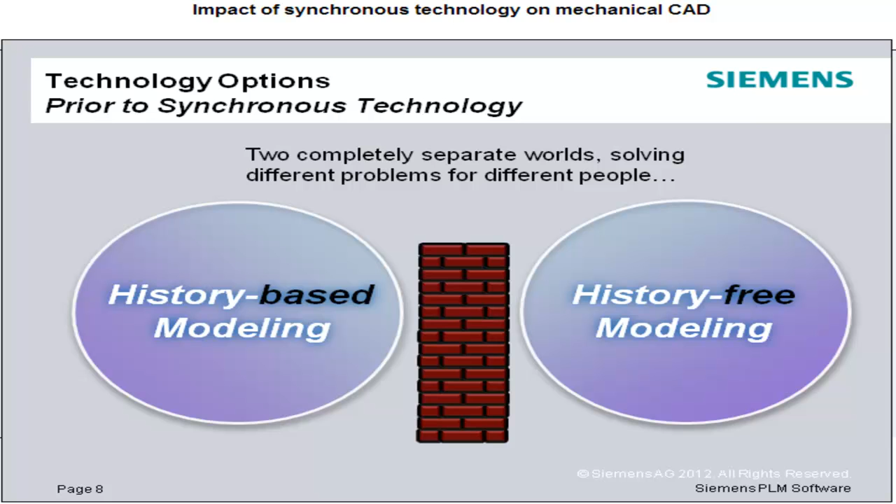So to understand those a little bit, I put together a quick backgrounder on each of the technologies. I expect most people on this call are more familiar with history-based, but I think Solid Edge still does history-based as well in certain areas, and it's something that we're all kind of familiar with, but we kind of forget some of the downsides of it. So I want to be clear on exactly how it works and what's the good and the bad of it.

So whenever you create a history-based model, it creates this recipe of steps, which is very valuable in that it captures the design intent. So you have the sketch profile, it's got dimensions, it's got constraints, all that stuff is captured, and it will replay those same steps to achieve a slightly different shape when you edit a dimension, something like that. The thing we often lose sight of is the downside to that approach, and that is that any edit requires a replay of all subsequent steps.

Now we all say, yeah, of course it does, but that's just because we're used to it. It's certainly not necessary to do so. If you have a hole on one end of your part that is feature 2, and you have a hole on the other end of your part that's feature 502, there's really no reason why editing feature 2 should recompute feature 502 and everything in between.

They're not related to each other in any way. And so that's really kind of a nonsensical thing that we've foisted on the community with history-based modeling.

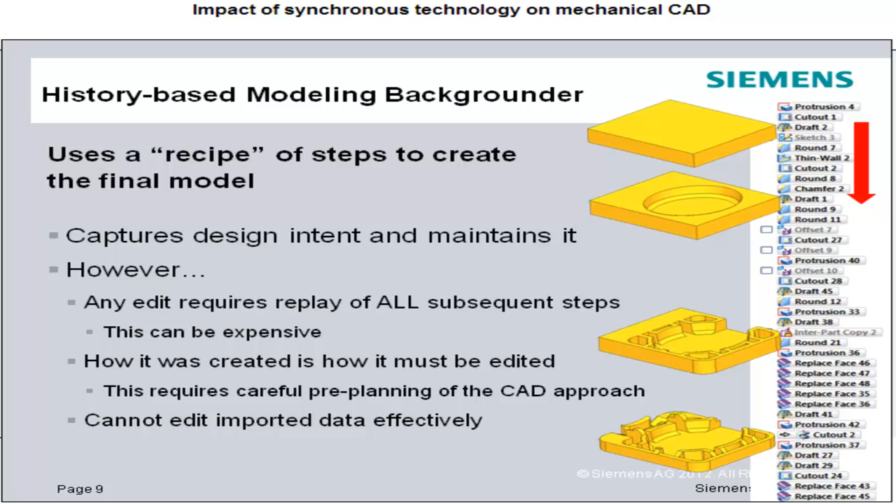So just to give a quickie on how this works, I think many of you on the call know this. If you start at the bottom of the screen and the boss says, make this oval bigger, you end up having to roll it back to the top of the tree here where the oval was instantiated, and this is a real part. Edit that, and then regenerate every feature below it whether they changed or didn't change. And so that's the good and the bad of history-based modeling.

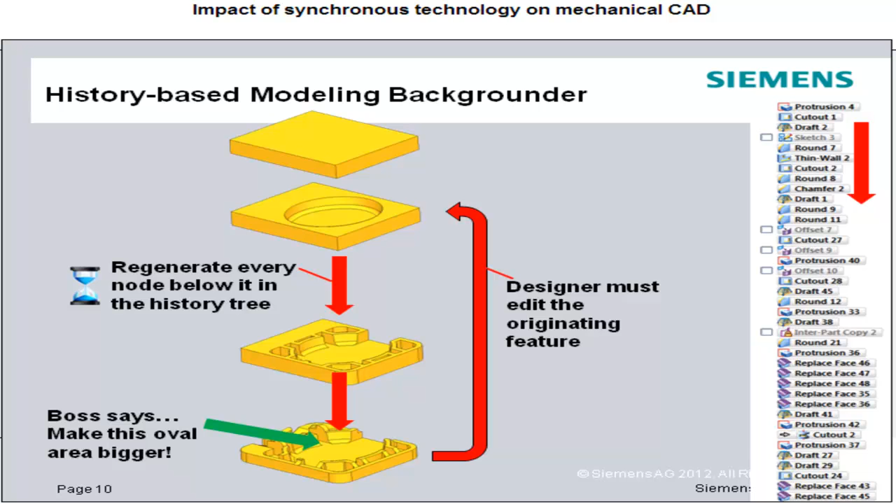If we then look at history-free systems, basically there is no recipe or history tree, so it is just the body itself, and you do all the editing. But typically in these systems, it's all done through a push-me, pull-you interface, so that's what I call it, where it can be precise, but it's not necessarily a dimension-driven system.

And so what you see is it's very fast and flexible because you don't have to recompute or regenerate the recipe. But they tend to be, and we looked at a lot of these systems before we built synchronous technology, the places where these systems tend to fall over is being not very feature-based.

It's hard to capture and maintain that design intent, and they tend to be significantly non-dimensional. You tend to do a lot more push-me, pull-you, and less, I want to set all these dimensions to particular values and have them respected. And so that's kind of the way a history-free kind of system would work.

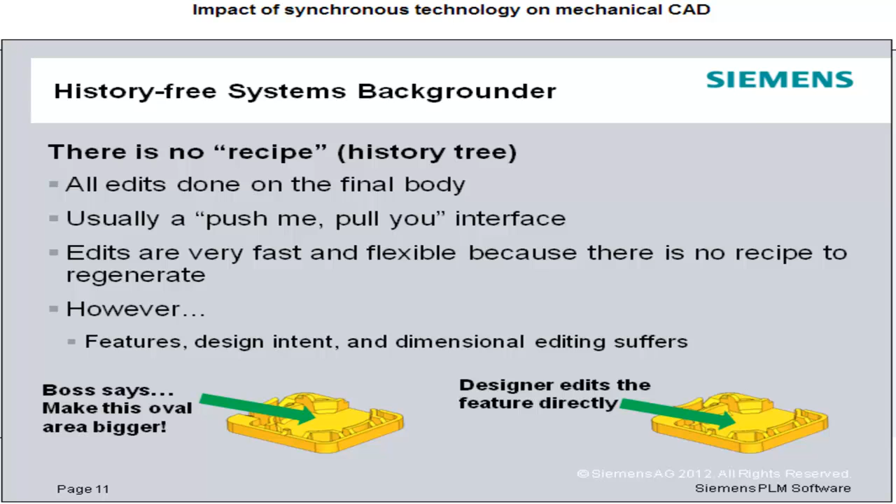Now, the reason this is relevant to you guys is what it ends up doing is kind of forcing you into a camp. You're going to have to decide, do I more fit profile A or profile B? Profile A being history-based: I've got these well-defined problems, my dimensions are well-known, my changes are usually fairly minor, and so on. People fall into this category of choosing a history-based system if they most closely identify with those statements.

Now, if you go over to history-free, people who fall into this category typically say, well, my design changes all the time, my design needs are very fluid, I don't know what changes are going to be asked of me, and so you end up in this direct manipulation, history-free modeling kind of place.

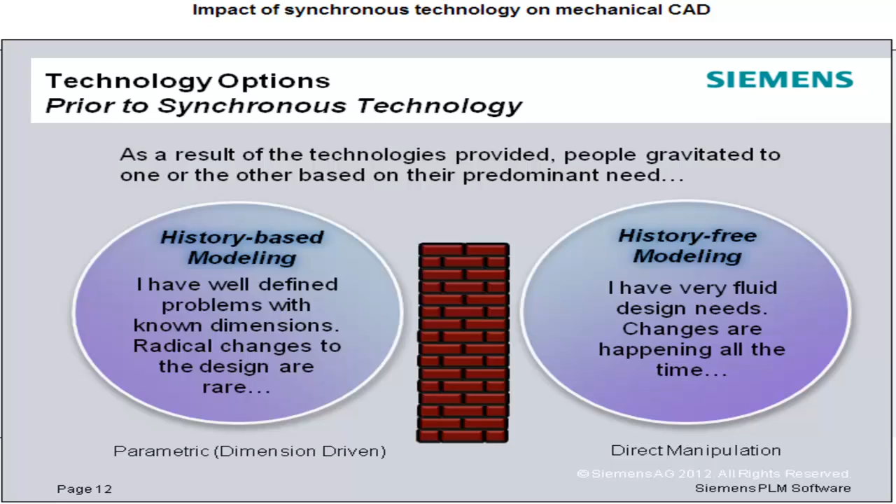Well, that's all well and good, but that's just because we as a CAD industry have pushed to you these two technologies, and you have to decide one or the other, even though you might not be able to identify with all of these statements, or you might identify with statements that cross the line. And so I think that's the big, bad secret: the user is not one-dimensional.

You don't fit in either of these two camps. So what tends to be true for almost everybody, I think, is, as we said, design is not a linear process. And so at the early part of design, you want to try out different things. You have very fluid design needs. But at some point, you get pretty locked down.

You're like, I need this to stay this way, I need that to stay that way. And so you have the very well-defined dimensions and behaviors. And then finally, we certainly can't make the presumption that you're just always designing all your own stuff. There's lots of stuff to integrate from other systems. So I think this is the more realistic profile of most users.

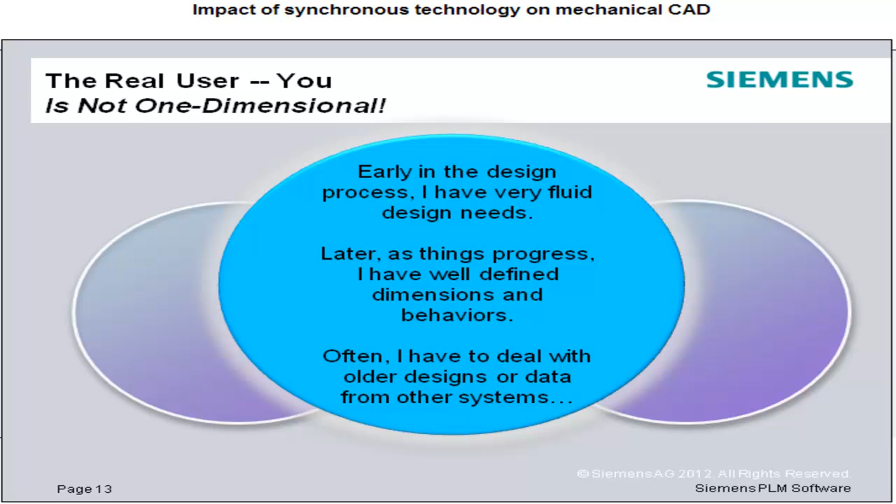And so as a result, that's what we developed with synchronous technology. If you think about history-based modeling, on the left, I want to be very clear - Solid Edge was purely a history-based system for 13, 14 years maybe. There's very good things in history-based modeling. It's very automated - you make a change, lots of good stuff happens. It's very dimension-driven, which is the way engineers and designers like to think. And it's feature-based. Those are all really good things.

Then outside the scope of that are some not-so-good things, right? There's the pre-planning that's required, the pain if you have to change something you hadn't planned for. Large feature models can take a long time to regenerate. So those are some of the not-so-good things.

If we go to the right-hand side of the equation, we see that history-free modeling also has some really good things. It's very direct - people love the directness. I just tell it I want to do this, and it does that, and it scales very well on many featured parts, and it's very flexible. But as I said before, it's not very good at feature-based modeling. Dimension-driven usually suffers, and so on. So there are pluses and minuses to each of these technologies.

So what we did with Synchronous was to say, well, why should I have to go into one camp or the other? Why can't I take the good dimension-driven, feature-based concepts and scale that well on many featured parts in a direct way? And the answer is, yeah, you can do that - you just have to invest a lot in technology to make it happen.

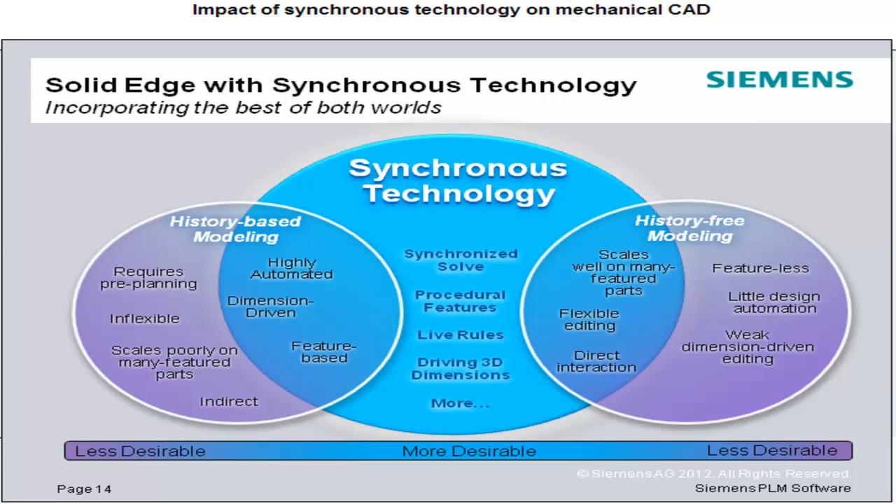I'll come back in just a second to how it is that we're able to invest in that technology and make it happen. But before I do that, I'm going to show you a little clip to compare the two. This particular clip revolves around the notion that we're going to do the exact same change, first in ordered or history-based, and then do the exact same change in synchronous, and just give you an opportunity to see and compare and contrast the two.

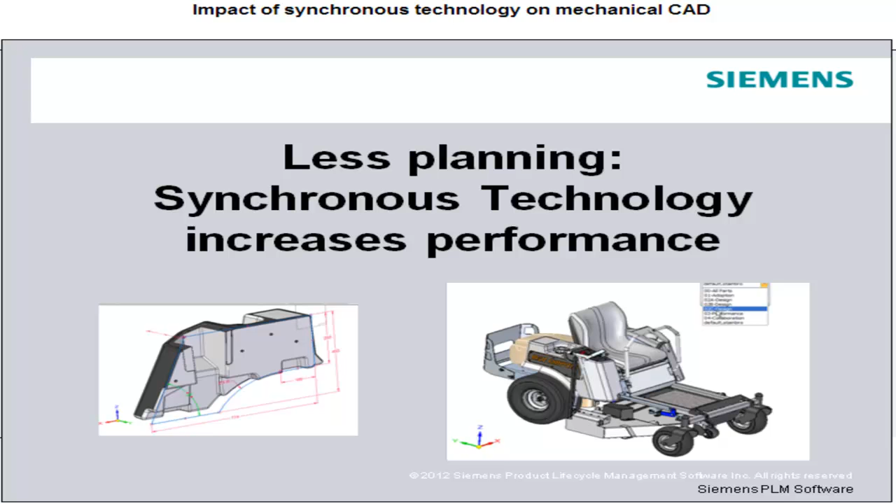If you've used a traditional 3D CAD system, you're familiar with performance issues due to model regenerations. Let's look at a typical engineering change order scenario and see how much faster edits can be made using Solid Edge with synchronous technology.

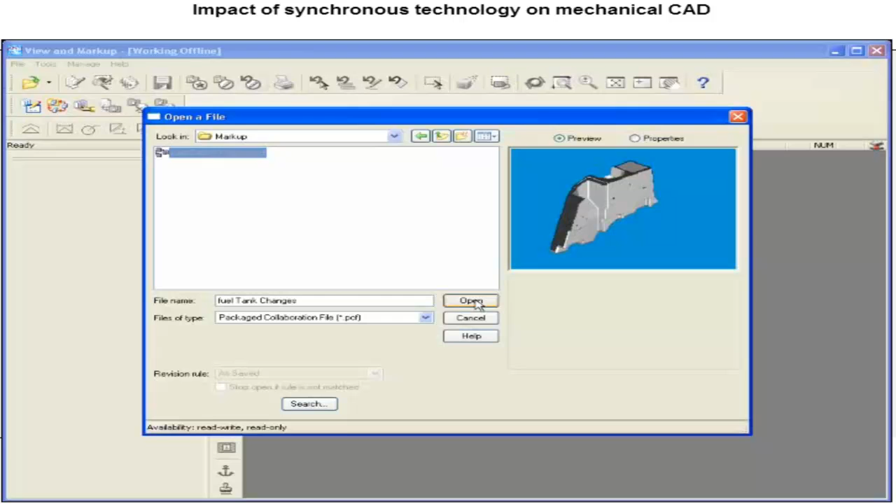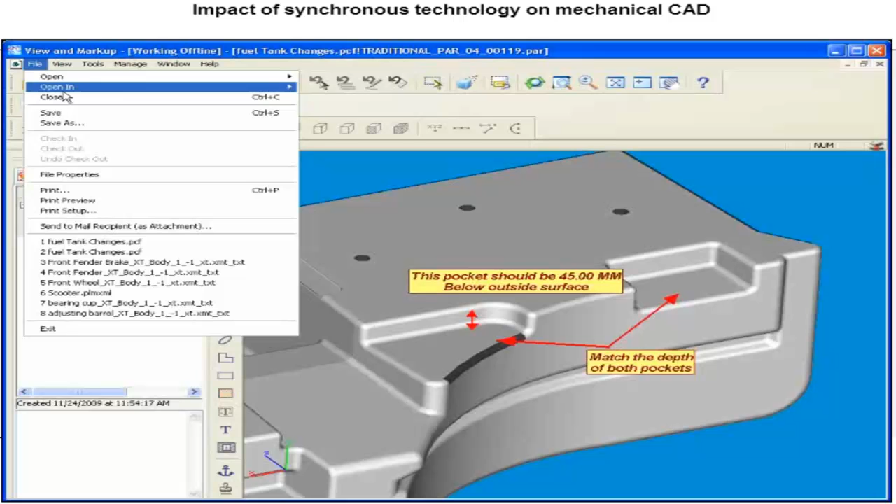Most change orders begin with documenting a set of requirements. View and Markup in Solid Edge allows you to efficiently mark up assemblies, parts, and drawings, which can be emailed using a lightweight PCF file. Recipients of the file can view the changes in Express Review, a free viewer that can be downloaded today. You can package all types of documents such as requirements documents, spreadsheets, drawings, and even images.

After reviewing the requirements in this engineering change order, it's time to make the edits. Before we show you just how fast Solid Edge with synchronous technology is, let's refresh your memory on what it takes to make changes in a traditional 3D CAD system. We'll start with this console cutout.

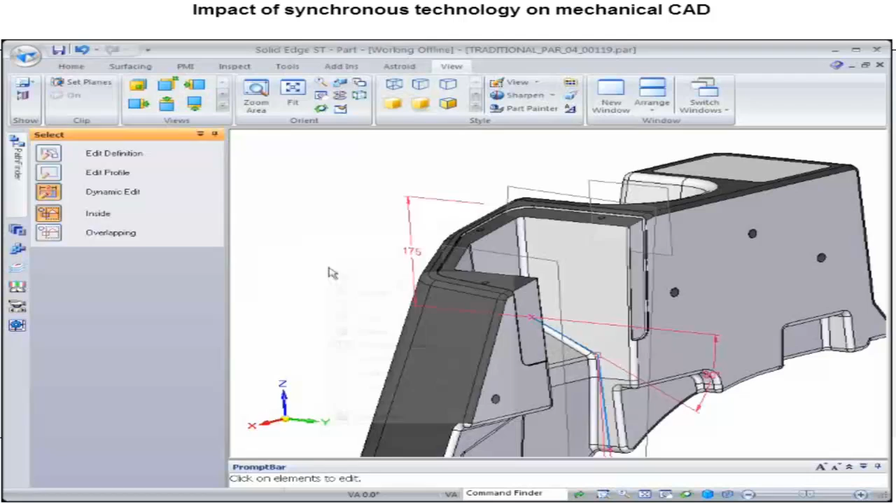Feature edits in a traditional CAD entail a delete and recreate process, so during any edit the model rolls back, deleting all subsequent features. Only features built to accommodate future changes will update correctly. We got lucky here as this feature was constrained to keep the cutout in the correct position. This simple edit took over 15 seconds to make, but larger models can take much longer.

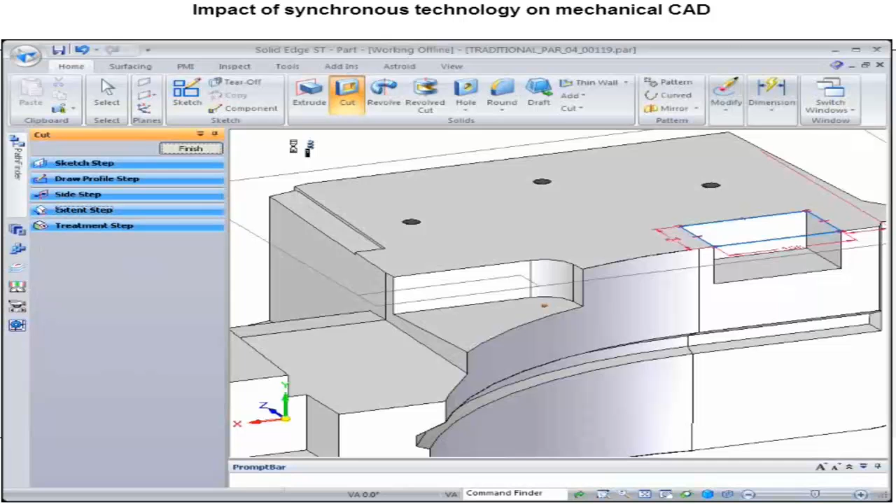We'll make similar edits to the frame and hanger clearance pockets. Once the edit is complete, all remaining features must regenerate, even operations that were not affected by the change. This rebuild process is a common source for model failures because subtle changes can cause severe and unexpected results. The behavior of this 20-year-old architecture is what most people consider the norm.

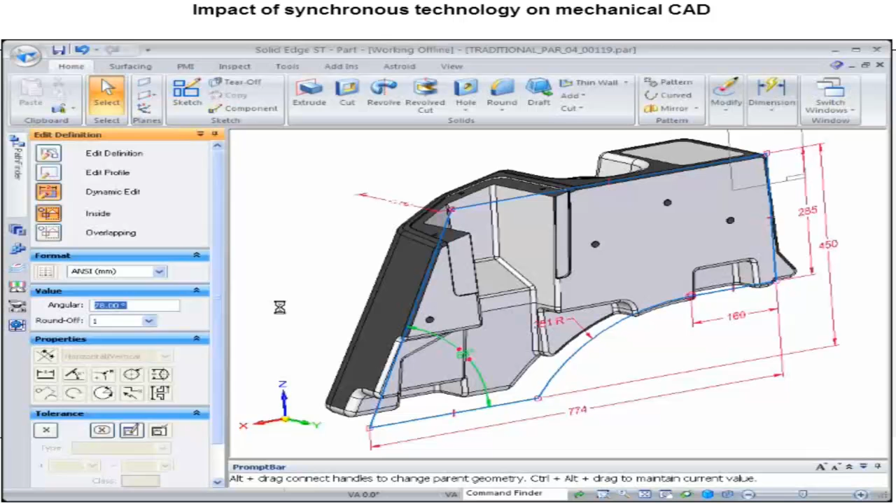Let's now make a more complex edit to the tank profile. Since this change wasn't something the designer planned for, the results will be unpredictable. Once the edit is complete, notice how many features failed. The original designer didn't build the model in anticipation of such a change, and this is a classic problem found with traditional CAD technology - during the regeneration process, subsequent features are bound to break.

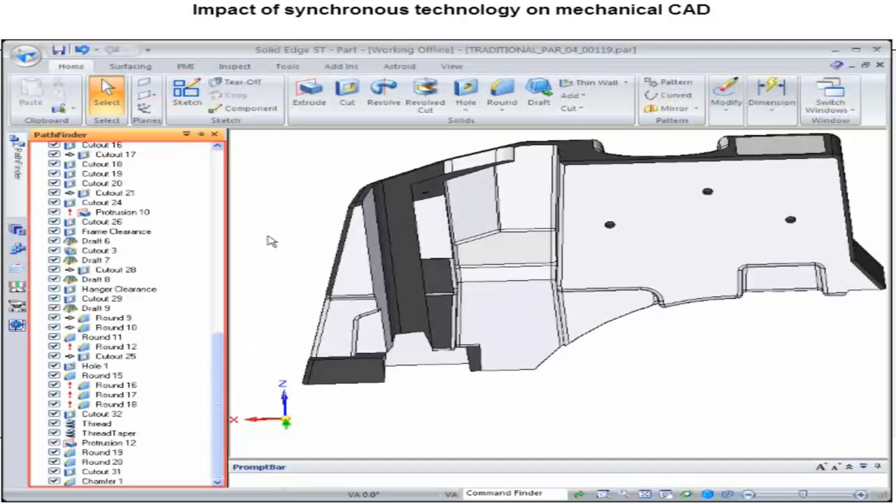Imagine the number of steps required to fix all these features. Creating models flexible to changes in a history-based system takes a tremendous amount of pre-planning during the construction phase so that edits will give the correct results. As we see here, the model wasn't built to accommodate even the simplest changes, and if you did not originally create the part, you have to untangle someone else's mess before you start.

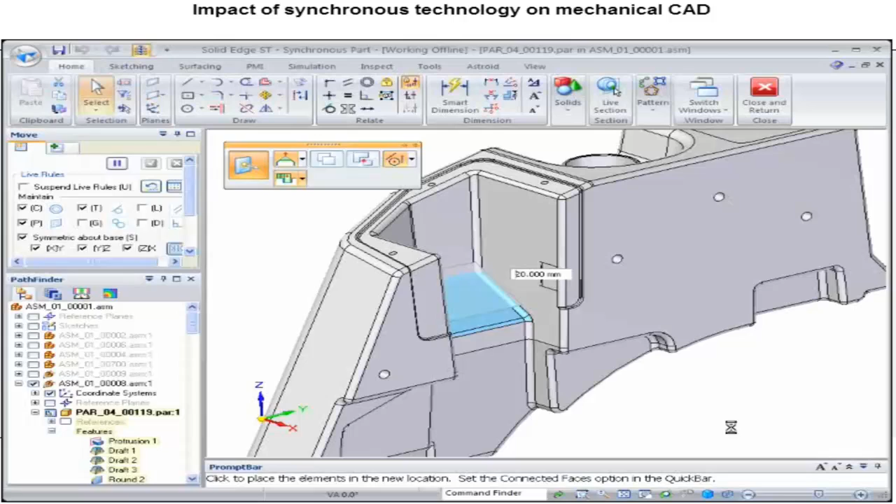Let's now see how Solid Edge with synchronous technology eliminates these issues. We'll make the same changes in Solid Edge so comparisons between the technologies can be seen. An initial difference is how models are edited directly. With this approach, changes are made directly to the geometry so you can edit in the most convenient way. Simply drag a face or add 3D driving dimensions.

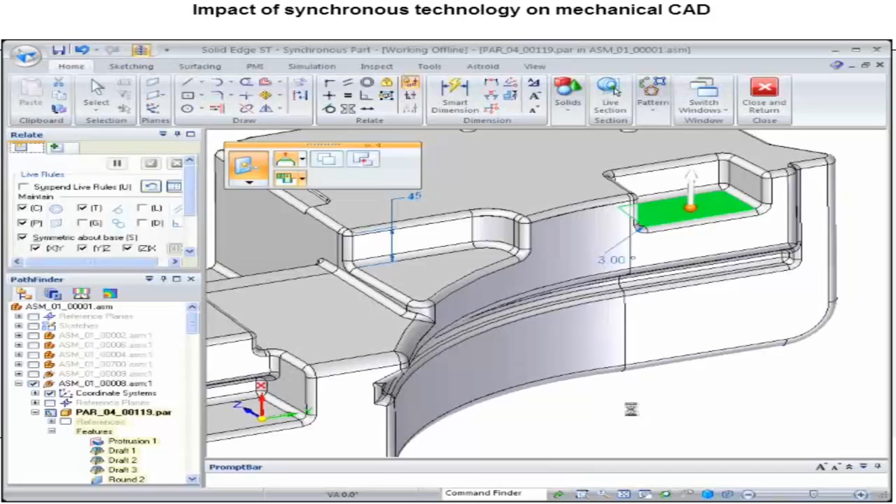Remember, the edits with traditional CAD took a while to recalculate and lots of additional time was required to fix failed features. But using Solid Edge with synchronous technology, these edits are done in just a few seconds. The edits you see here are happening in real time. When you need to make fast, reliable changes, there really is no better system than Solid Edge with synchronous technology, even with parts coming from other systems.

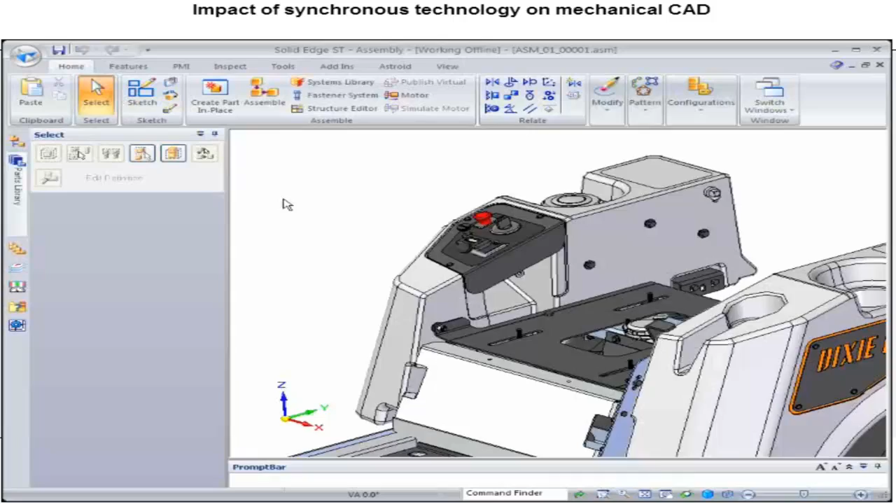Okay, so hopefully you're able to see in that video some of the difference between the technologies and the productivity that Synchronous brings to the table. I think one of the obvious questions is, well, how exactly is it that Solid Edge has this technology and others don't? I think I can most easily explain that in terms of the way different technology stacks work.

When we talk about a software stack, it's how you build up a product that you deliver to an end user. So if we take an example, SolidWorks, at the very base of the technology stack is the thing that does the geometry modeling, the thing that, when you create a cutout, a protrusion, a hole, any of that stuff - pretty tough, difficult math down there. That's all done by a piece of software called Parasolid.

There's another piece of software that deals with constraints. When I want to put together an assembly and assemble together parts, align some and mate some and so on, how does that solve into a cohesive whole? That's done with a technology called D-Cubed. Now, these are technologies that we actually write as part of Siemens and are provided to Dassault SolidWorks.

Now, what they do with those technologies is wire them together with all the user interface and a variety of other glue. I want to be clear, Dassault SolidWorks is a very good product with a lot of very smart people, and they wire it together in ways that are valuable to you as an end user. But it's basically taking the technology which we provide, wiring that together to create the various commands that are provided as the end user CAD product.

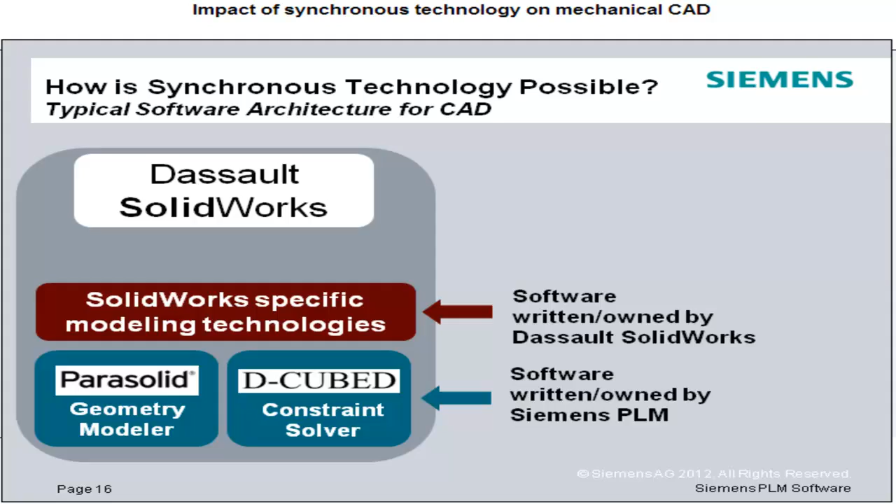The reason I want to explain this to you is to contrast that with the Solid Edge technology stack. In this particular case, we own all the technologies top to bottom. So Parasolid, the geometry modeler, and D-Cubed, as I said, are written by us. And so as a result of that, Synchronous technology is really a marriage of those two in a very interesting and unique way with a lot of unique concepts.

It's really enabled by the fact that, owning the entire technology stack top to bottom, we have unique understanding, unique relationships, and so on that allow us to create this synchronous technology layer. And then, of course, on top of that, we build Solid Edge, where we wire the synchronous technology in with the rest of Solid Edge to deliver this to you. I think this unique combination of the two technologies and the fact that we own the stack from top to bottom is largely what allows us to bring this technology to you where no one else can.

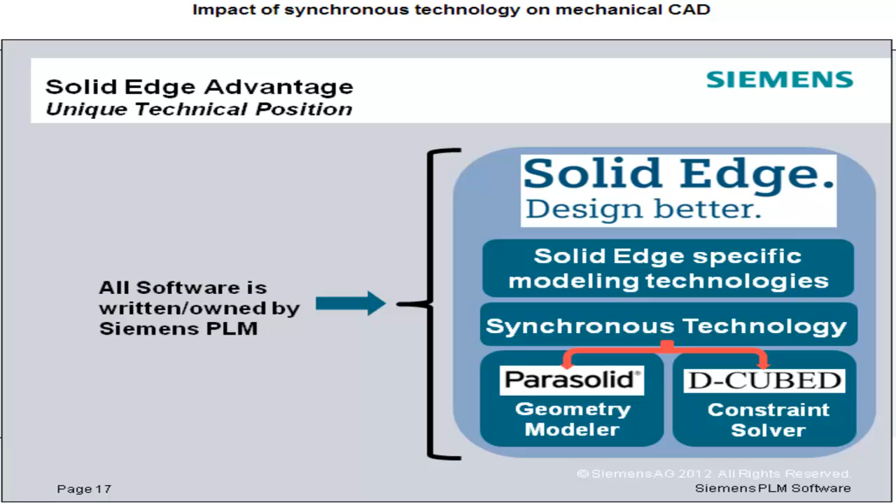Whereas the lowest layer of that stack, the Parasolid and D-Cubed, we made a decision many years ago, probably 20 years ago as a company, to keep that level playing field. We provide those technologies to our competitors, such as Dassault SolidWorks, and that's the level playing field. With Synchronous technology, we made a strategic decision many years ago that it's not going to be a level playing field product, so that's not a technology that they can source from us, nor can anybody else.

As a result, the things you'll see in Synchronous technology are in fact unique to Solid Edge and our NX product lines, something you won't be able to source anywhere else in the industry. That's the magic behind Synchronous and why we're able to bring that to market and help you with these issues.

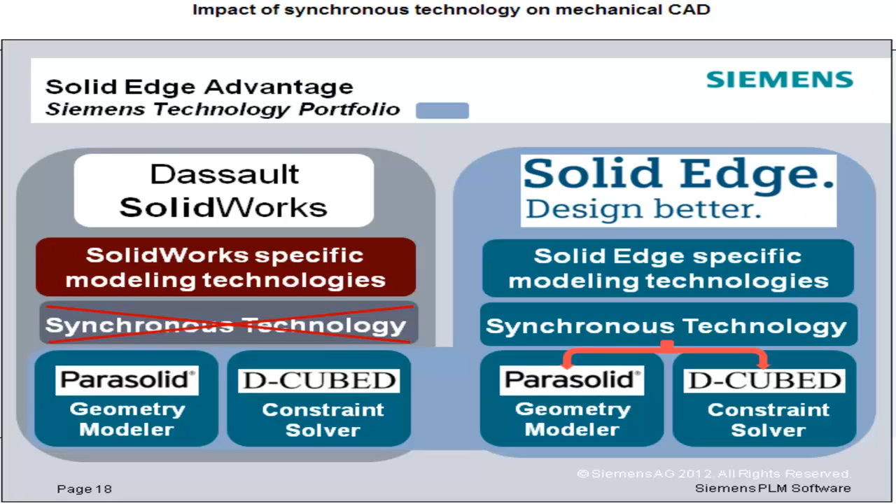I want to go to another video here. I saw there were people from Inventor, SolidWorks, and so on the call. There's a unique technology we put in place just for that purpose: the ability to take solid models from those systems, bring them into Solid Edge, and then take the dimensions from the drawing and drive the model with those dimensions, even though it came from a foreign CAD system. Take a look.

Solid Edge ST3 lets you preserve design intent from imported 2D drawings to imported 3D models to improve data reuse. Let's start by reading a 3D part and associated 2D drawing from another system. Solid Edge's migration wizard ensures drawings look the same in Solid Edge as they did in the original system, including layers, line styles, color, drawing scales, and more.

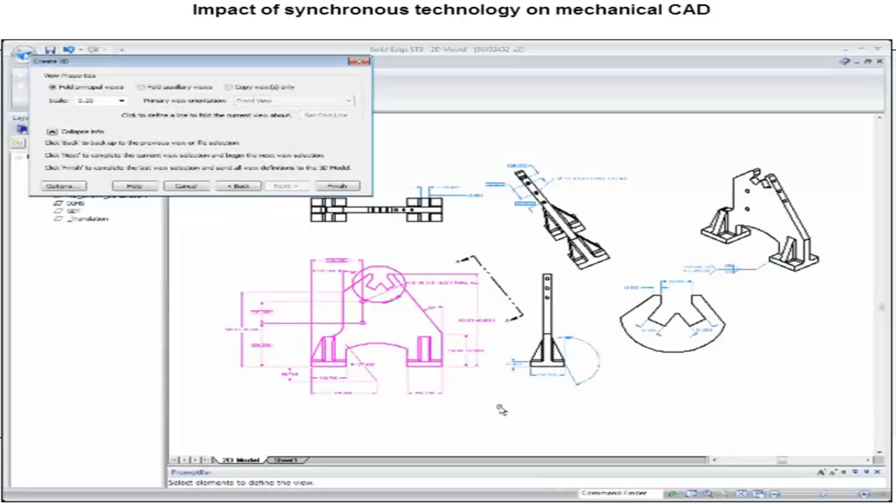Using the Create 3D command in Solid Edge ST3, manufacturing dimensions from the 2D drawing are automatically added to the imported 3D model. These manufacturing dimensions are key when making changes. The goal is to alter the dimensions directly, not the indirect sketch dimensions used during modeling. Prior to Synchronous technology, imported models had to be redesigned to allow edits, but with these new enhancements, designers can make changes as defined in the 2D drawing.

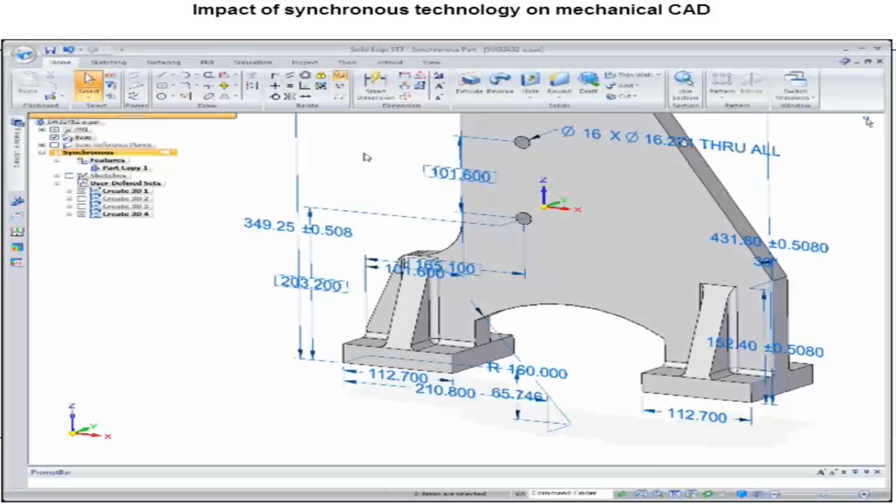Once the process is complete, the 3D driving dimensions can be edited. Unlike feature dimensions that control parts of a model, designers can now control what really matters, such as distance between holes and overall size across multiple features. The ability to edit imported models with precise dimensional control is made possible only with Synchronous technology.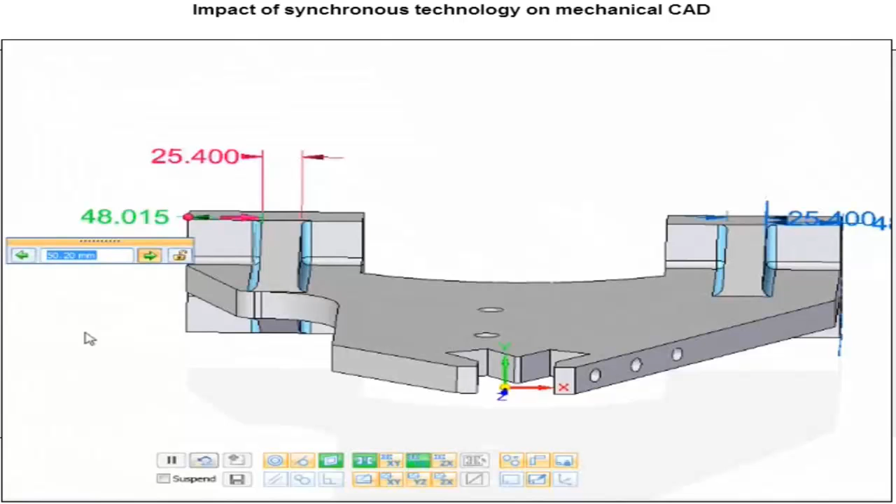During edits, design intent lost in translation is found and maintained with live rules. This keeps designers from having to remodel imported parts even when simple edits are needed. A similar behavior is seen when the base plate thickness is adjusted—other coplanar faces are maintained, keeping the designer from making two edits.

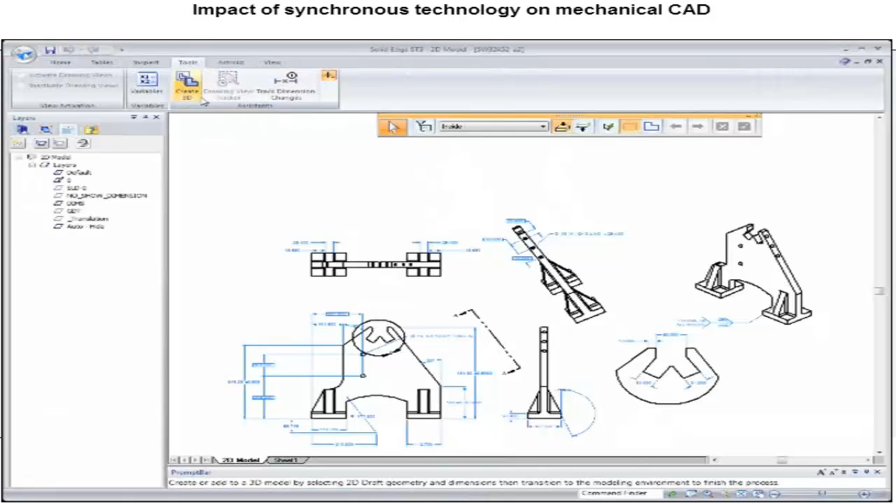You can add dimensions from other drawing views all at once or at any time, depending on design needs. Here, the dimensions from an auxiliary view will be transferred to 3D, ensuring the positions of holes along the angled face are kept using the dimensions defined in 2D.

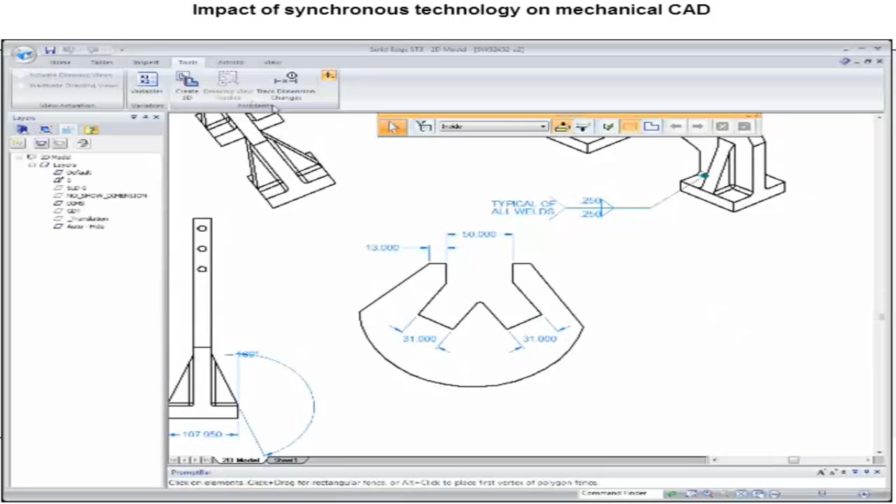Even intent established in detail views can be transferred into 3D. Regardless of drawing view scale, dimensions can be moved from 2D to 3D and are ready for edits. Watch as a precise change is made.

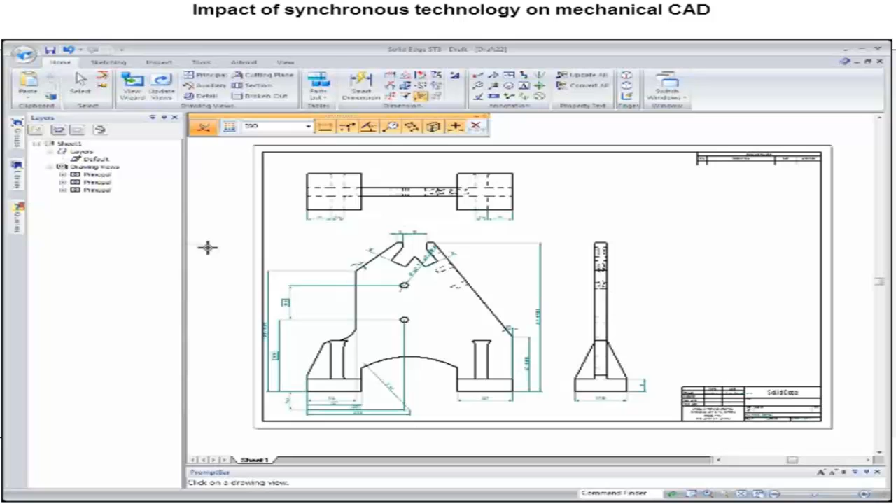Finally, fully associative Solid Edge drawings can be easily generated and manufacturing dimensions can be retrieved, ensuring design intent is maintained throughout. This new capability within Solid Edge ST3 helps designers reuse more 3D data from customers and suppliers, which helps reduce overall engineering costs.

I hope you're able to see in that video something that I think is really amazing—something that 4 or 5 years ago, if someone said that exists, I would have called them a liar. The ability to marry a 3D model with the capability to inject dimensions into it from a foreign system and drive it.

So I want to sum things up here from my point of view and get some customer perspectives. I told you we were going to help you accelerate your design for faster time to market, and I hope I've given you some idea of how that's true. Being able to recognize that design is not a linear process, you need to be able to head down blind alleys and back out, try different things, while still controlling it very precisely.

You certainly need to be able to make the revisions your customers need, and design intent need not be locked in stone—you need to be able to keep or change intent as required. Because there's no such thing as model regeneration, it's an extremely fast process. Being able to reuse and repurpose that imported data, I think, is very key.

Repurposing data, perhaps even from a long time ago, and taking those potentially dumb solids and making them smart and usable. And if you're coming from 2D, you don't need to be worried about the system and how long it will take you to learn. You'll have very little downtime as you learn Solid Edge with Synchronous, because you really get the 3D power with the 2D simplicity.

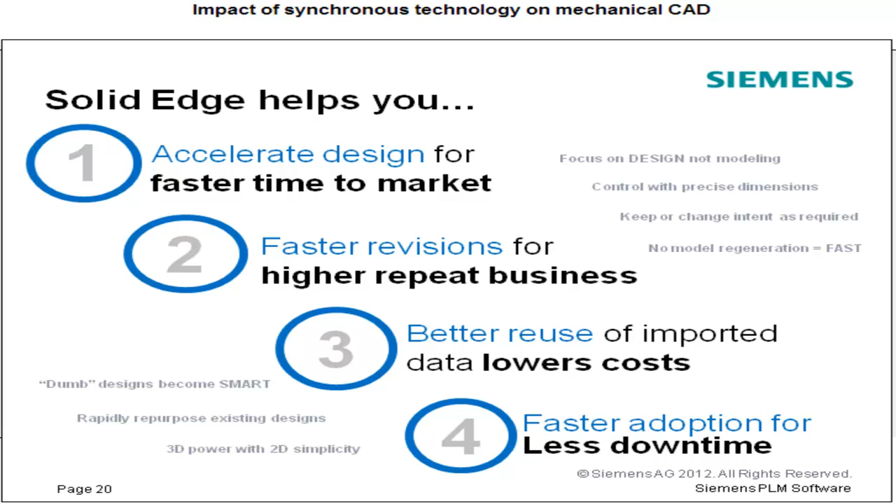Okay, thank you. I'm going to start by talking a little bit about my company and then why we decided to go Synchronous. Kimball International provides engineering and manufacturing services for electronic components and office and hospitality furniture under the brands Kimball Office, National Office Furniture, and Kimball Hospitality. Kimball has been using CAD technologies since the 80s. In the early 90s, we moved to I-deas, and in 2004 to Solid Edge.

Since then, and until recently, we have been using history-based CAD technologies. While we moved to Solid Edge, even though we got a better CAD system, we left behind thousands of legacy files in I-deas format.

This older data created using I-deas remained difficult to use, but is still very important. This presentation was originally created for our own engineering management team to show them why we decided to go Synchronous. What are the advantages of Synchronous technology for Kimball? What are the benefits, the constraints, the challenges, and the opportunities? With some modifications, mostly to reduce the original presentation from 1 hour to 15 minutes and to replace heavy videos for lighter slides, to make sure that they work in this webinar, this presentation will give you an idea of what Synchronous technology is and what you should expect from it from a user perspective.

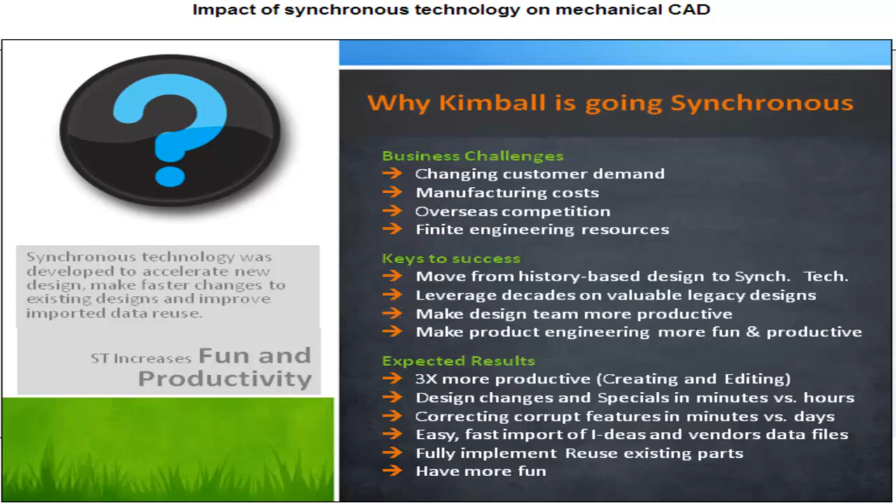I showed our management team two simple videos of what Synchronous technology is and why it will make a difference for us. I'm not showing these videos here due to time and bandwidth constraints. However, I will talk about them.

I'll show them how we can create complex shapes in seconds using regions, like this gear. I draw a square and a circle, then I make 4 rotated copies of the square, then I pull the resulting regions, creating the final extruded shape in a very short time.

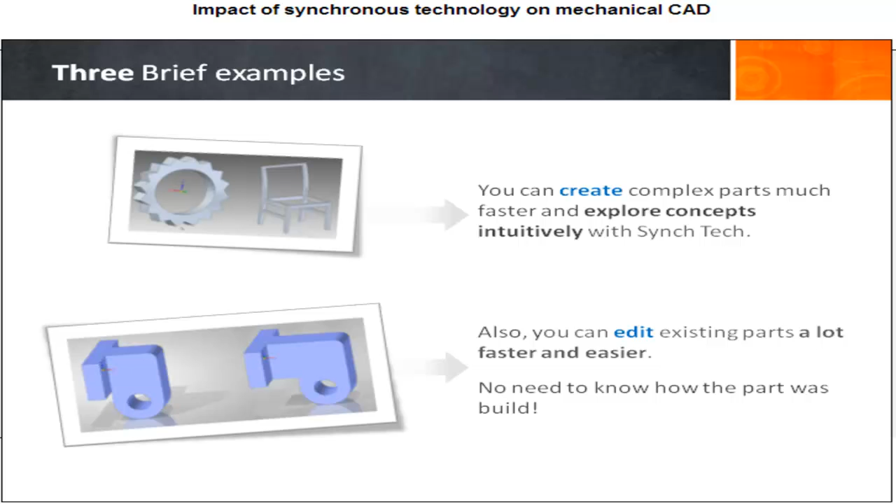In the second video, I show how to create a basic 3D model of a wood chair from a napkin sketch. Using the technique just shown in the previous video, we copy the two-dimensional information from that napkin, and then we create a simple chair, and we have time to explore all the different options.

Synchronous technology is still evolving. Siemens has been adding hundreds of user requests to each new release, and I believe that ST4 is mature enough for Kimball to implement it now.

All our case goods, machined parts, sheet metal parts, and assemblies can be done or edited now in Synchronous technology, and that eliminates a lot of tedious tasks. It is especially powerful in creating specials from existing components.

Most wood chairs and many components for non-wood chairs can also be handled in Synchronous technology. However, complicated surfaces like those in seats, backs, and armrests are not a very good fit for Synchronous technology. However, using both technologies in the same environment, in the same part, solves the problem. We can do all features required by the design intent in Synchronous technology, and cosmetic and manufacturing features like rounds and drafts and complex surfaces in ordered.

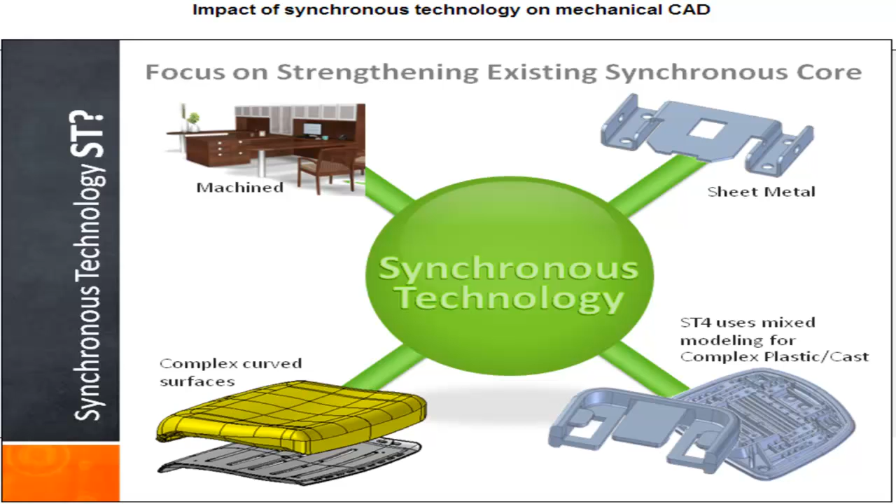We know Siemens is still working on making synchronous technology more powerful, so we hope that in future versions we'll be able to handle all these complex components in the synchronous environment.

What are the reactions to the new software? Well, this is not new software, but in some way it's a new way to work with CAD models. Ironically, it's the way that I learned when I was a kid. When I started exploring synchronous technology two years ago, I was not sure about it. It changed almost everything I learned in the last 20 years about good CAD practices. After some training and a lot of practice, I started forgetting all these computer-driven techniques and relearning how to go simple. When I understood that history is completely irrelevant in synchronous technology, that was my aha moment. I started liking it. Now I'm sure that our engineers and designers could be a lot more productive. We are rediscovering how fun product design is.

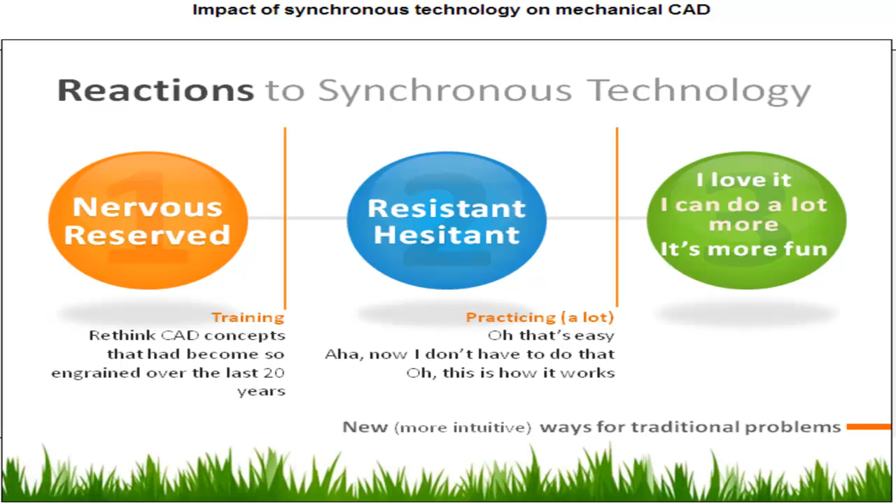This is not the first time that we made a big change in our engineering information system. As I mentioned before, in 2004 we migrated from I-deas to Solid Edge. So we know how hard it is to do that. It is a CAD manager's nightmare.

So is it really a CAD manager's nightmare, or are we just overreacting to the natural resistance to change? Well, it is. It's a real CAD manager's nightmare, I'm telling you. Training 50 advanced engineers, 30 casual users, implementing new standards and new best practices, dealing with the learning curve for weeks or maybe months, and dealing with all the natural resistance to change — it's a lot to do.

So does going synchronous outweigh all this? We believe it does. The improved productivity, the fact that we can use legacy I-deas and vendors' data directly, are really big advantages.

So once we learn what synchronous technology is and understand these four basic concepts — that history is irrelevant, that the steering wheel is the main and most used tool for 2D and 3D geometry manipulation, that live rules and relationships are ways to get there faster and we have full control of them, and working in the assembly — then we know that it will work.

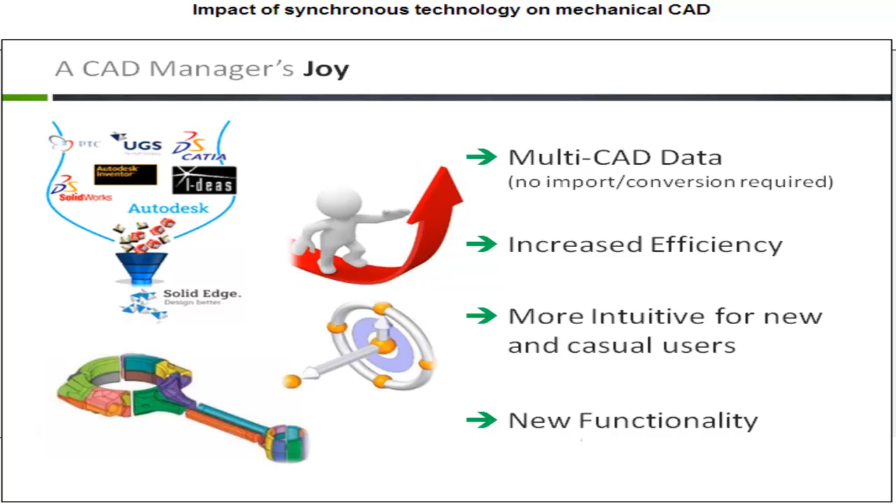These are, in my experience, the four key concepts that you have to understand to implement synchronous technology successfully and improve your productivity: learn how to manipulate the steering wheel, fully understand live rules and relationships, and remember that history is irrelevant — how you got there is not important, only the final result.

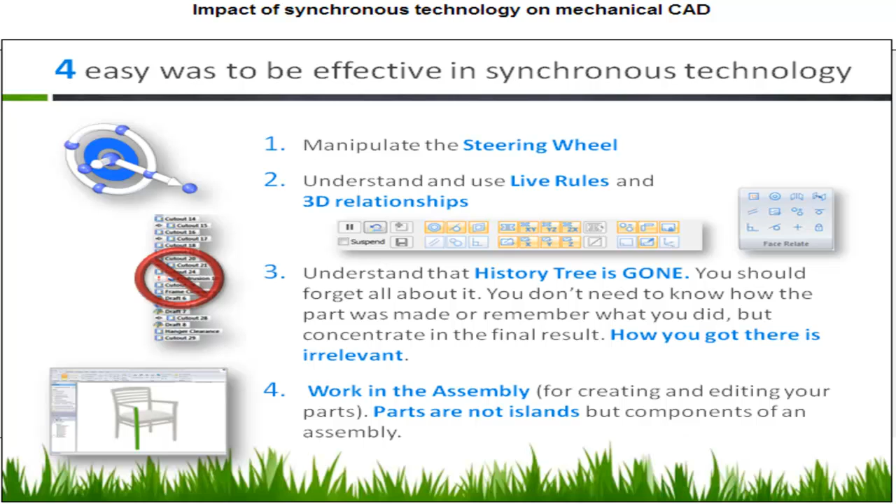And working in the assembly. Remember that parts are not islands. Use the assembly reference to create or edit your parts. No need to open, change, close, reopen, change again, close, and do this for hours.

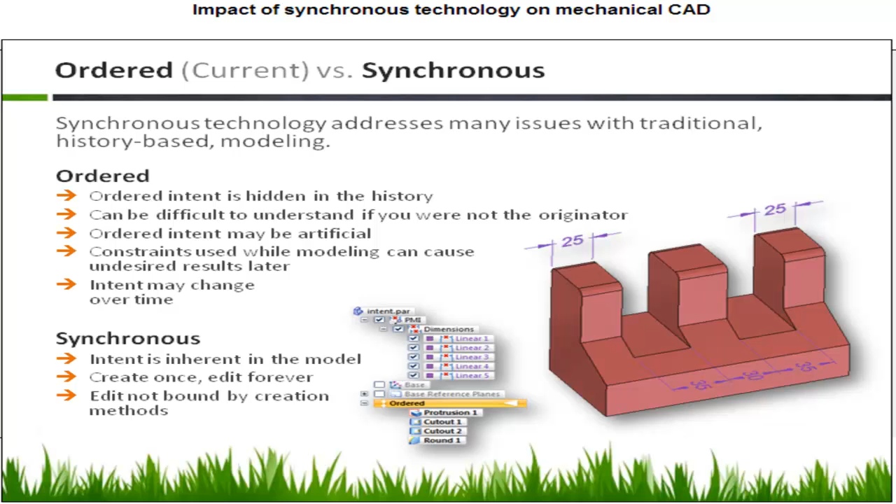In synchronous technology, the design intent is inherent to the model. You create once and you can edit forever. Editing is not bound to any creation method. One of my favorite parts of synchronous technology is the ability to create and edit parts in the assembly context. You really save hours of work by editing directly in your parts using the assembly reference instead of the open, edit, close approach.

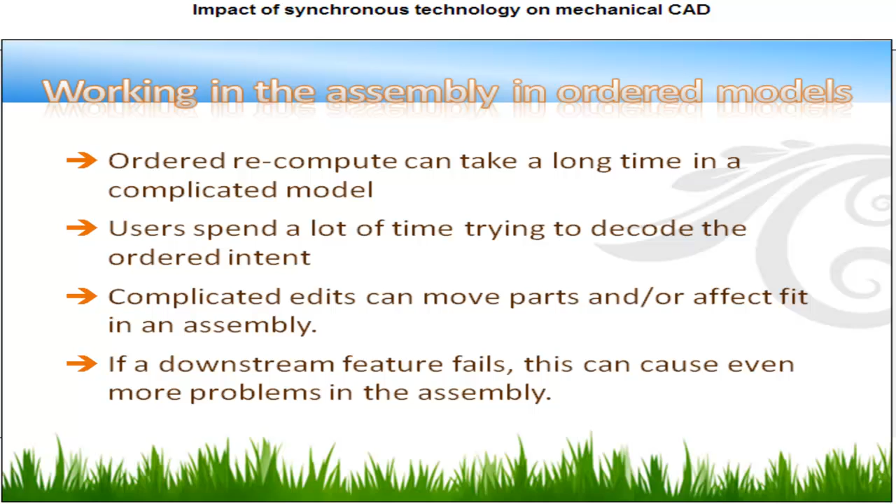Many times our engineers decide to start from scratch instead of using existing parts because recomputing ordered parts takes a long time in complicated models. Users spend a lot of time trying to decode the ordered intent. If you are not the originator of the file, it takes a long time, sometimes it's impossible to understand what other people did with the file. Complicated edits can move parts may affect the fit in the assembly, so if you make a change downstream and it fails, you'll spend hours redoing the whole assembly.

I'm going to show you a real situation. We needed a new credenza with 3 doors. All features, including style and color, match an existing product. So instead of starting from scratch, as we used to do with older technologies, we use an existing credenza with 2 doors and 4 drawers. But we have a problem: this product was designed 15 years ago, and all data is in I-deas format. With synchronous technology, it's not a problem anymore. We can reuse all this legacy data immediately.

However, when I tried to open my assembly, I found one part missing. I had the drawing, but the solid was gone. No problem. Again, with synchronous technology, we use the same technique that Dan shows in the last video to create the missing parts from the existing 2D geometry in minutes. Then, using synchronous technology and working in the assembly context, I created the new assembly in 10 minutes. Hard to believe, when I know that with older technology it would take 3 or 4 hours.

Originally, this was a video showing in real time the conversion process, but for this presentation, due to time and bandwidth restrictions, I will use a series of screenshots. Keep track of the stopwatch in the upper right corner.

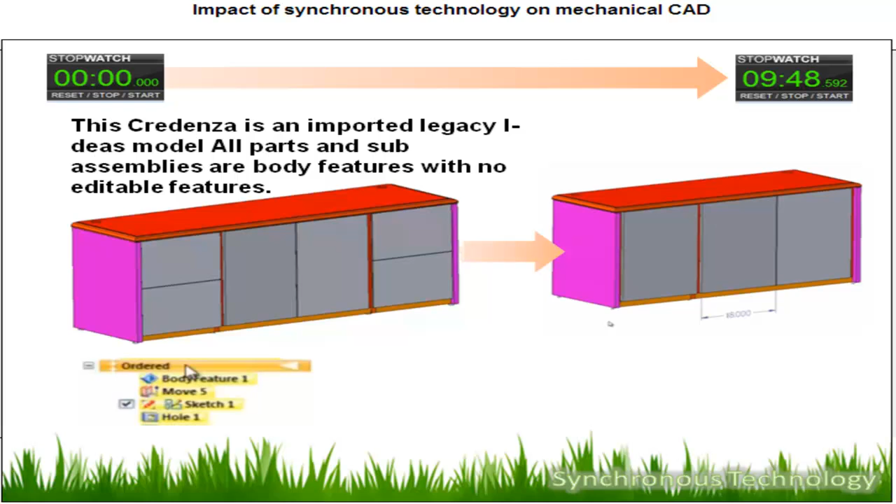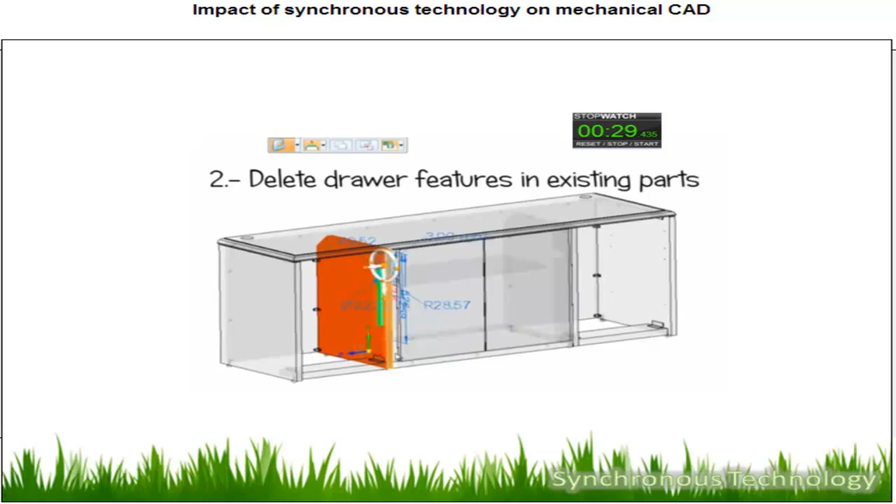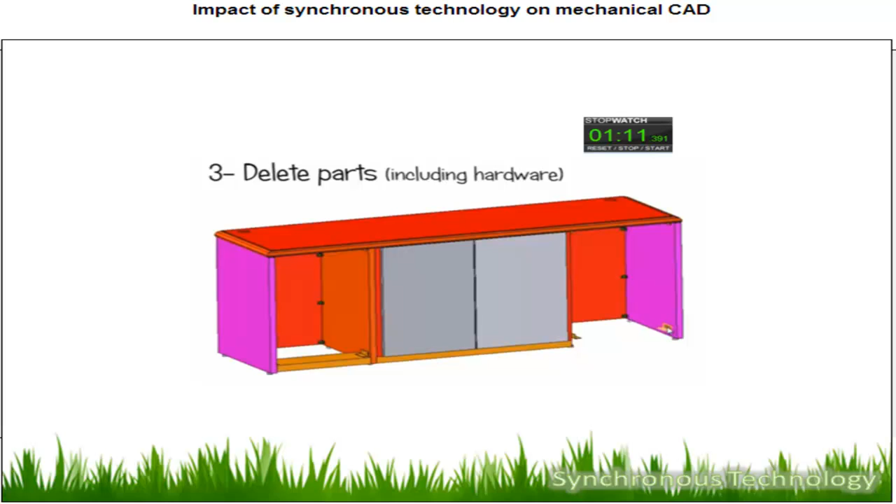In this credenza, an imported model from I-deas, we start with that, and then we delete all the features that we don't need. We can work directly on each part without opening those components. We delete or adapt more of these features. We delete more parts, including hardware. We have a lot of small components that need to be removed from the existing credenza.

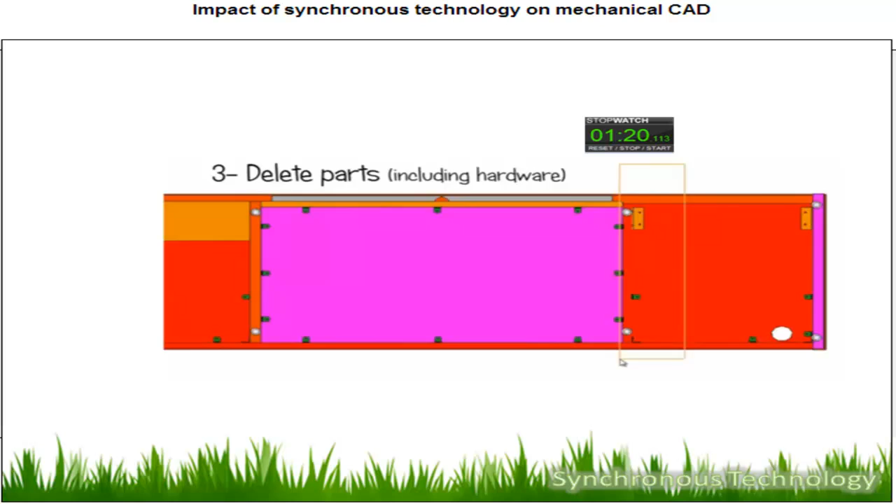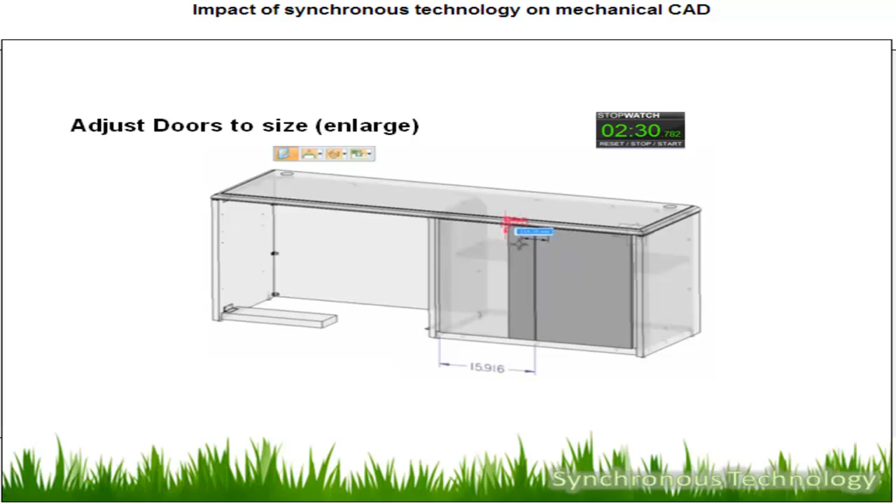Then we move the existing doors section to the right without even knowing the dimensions. We just use the steering wheel, one starting point, and one existing reference point to do the whole moving. Then we adjust the door size. The new credenza requires bigger doors, so we just adapt the existing doors, growing them with click and drag. And then we move the doors to the right position.

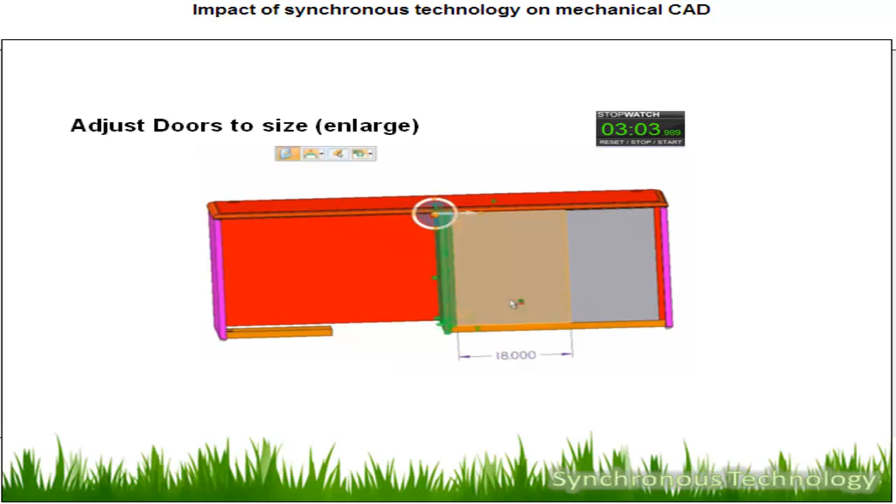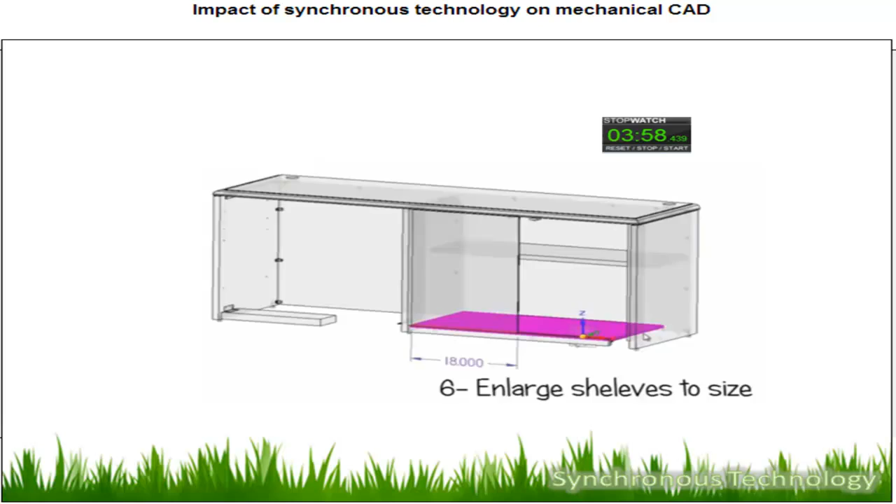We have inner shelves also, so we have to enlarge those shelves to match the new dimension, and again we didn't use any dimensions. We just click and drag using synchronous technology in the assembly. The hardware is adjusted using predefined rules.

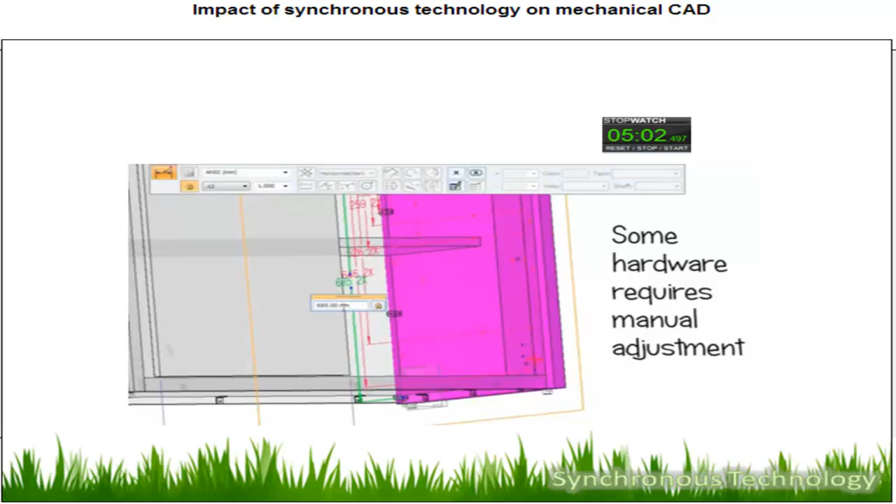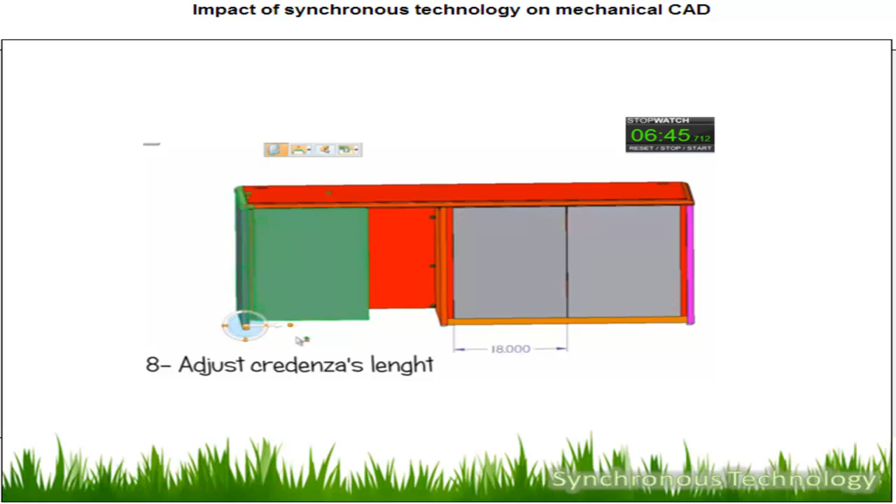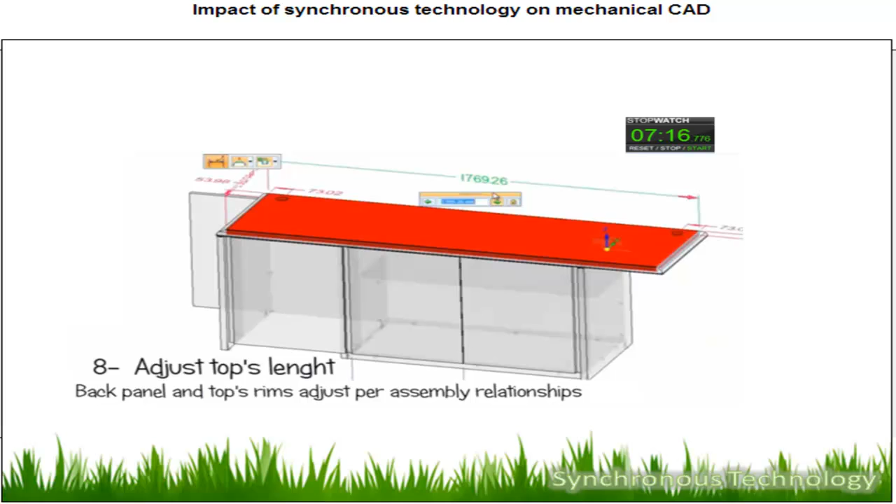Then we add an additional door. We adjust the size of the credenza, and then we have to change the size of some components. We use synchronous technology, assembly relationships, and moving only one dimension, we adjust all of those components at the same time.

We add more shelves to the right side. We adjust the size of these new shelves. And finally we adjust the remaining hardware. And done. We finish something that usually takes 3 to 4 hours in less than 10 minutes.

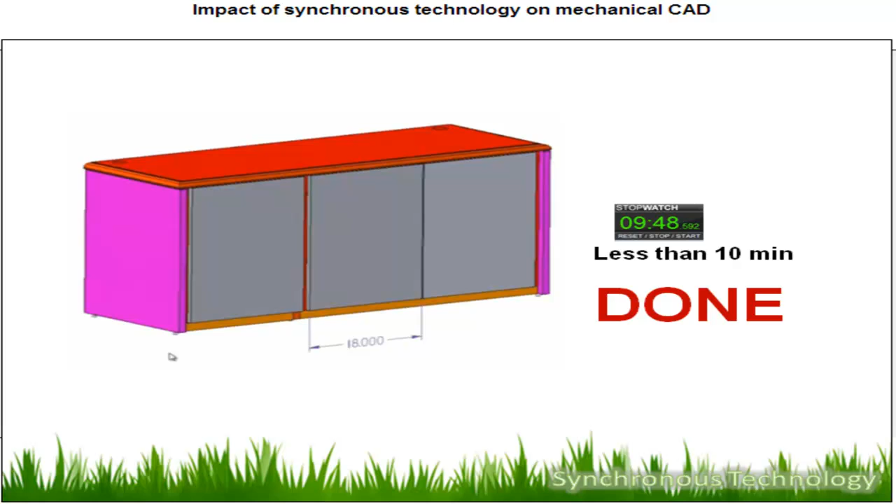Summarizing this experience, we estimate that we will improve our productivity after the learning curve period, and we estimate that we can go from a little more than 7 hours to a little more than 1 hour working on similar assemblies. The challenge now is to make this possible across the whole company.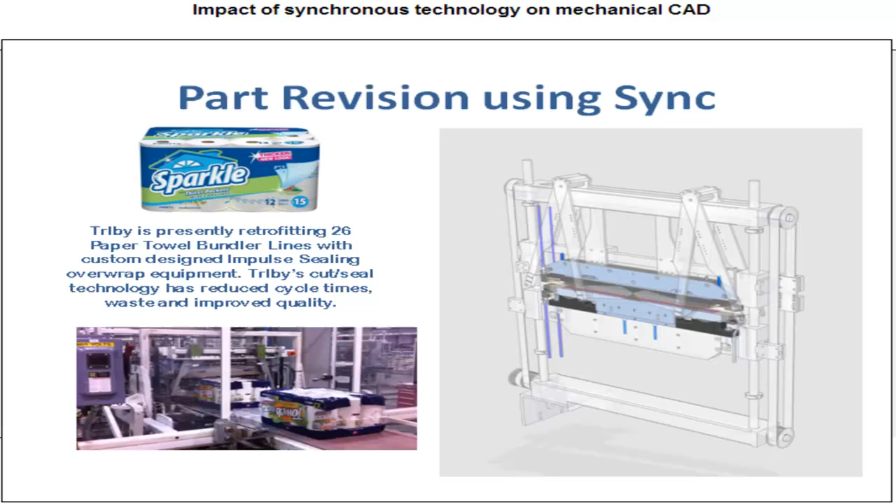Recently we had a project, and we're still actually working on this project, where we are retrofitting a bundler system for a paper mill. They have 26 of these paper towel bundlers, and this actually puts the overwrap around paper towels and paper tissues. The specific thing I'm going to talk about is one of the blow-off plates, which required air deflection plates and air channels to blow cold air onto the process after we've done the heat sealing.

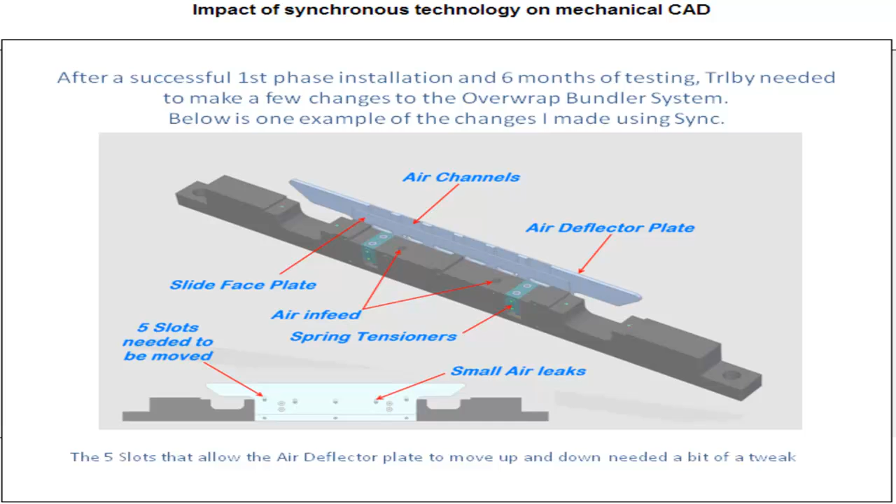The original installation we had in there for testing had a few small air leaks, and we needed more airflow across the web.

So in History Base, I was very comfortable with how to do this. I would go in and look at my sketches, which were the basis for all the parts. In this case, I show you the top outline of the part. The second picture down is the air channels. And then finally are the slots, the 5 slots that basically hold the plate in place and allow it to function, go up and down.

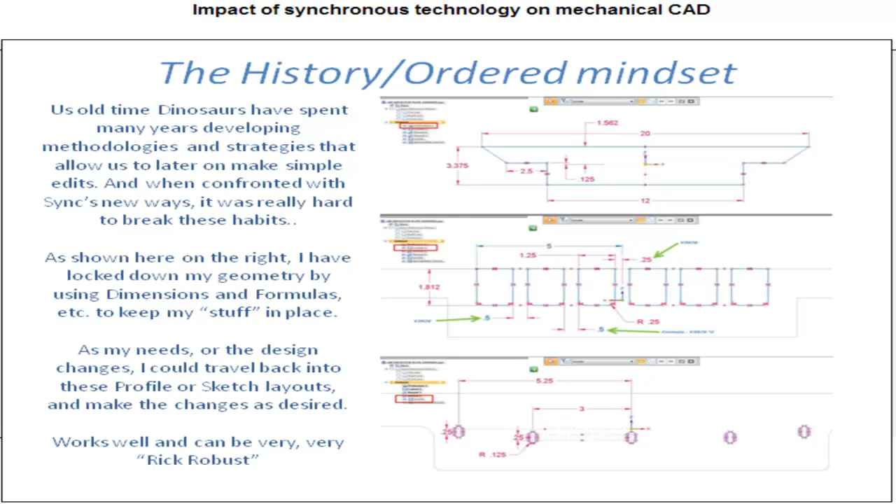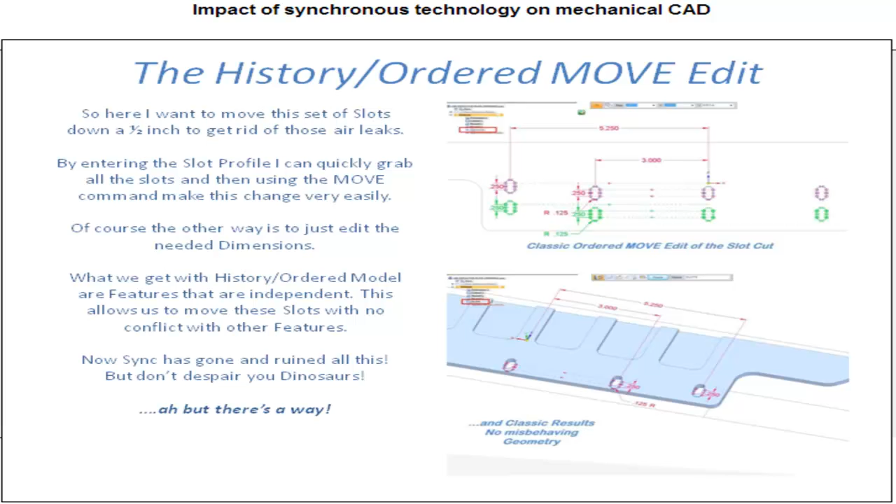When I moved some of the areas, I would end up with some issues. When I moved to sync, I actually found it at first very difficult, but I realized sync was smarter than I was at this. Moving these oval slots was a little bit difficult because of user intent, and actually there was more user intent in my part than I gave credit for. Sync was smart enough to see this.

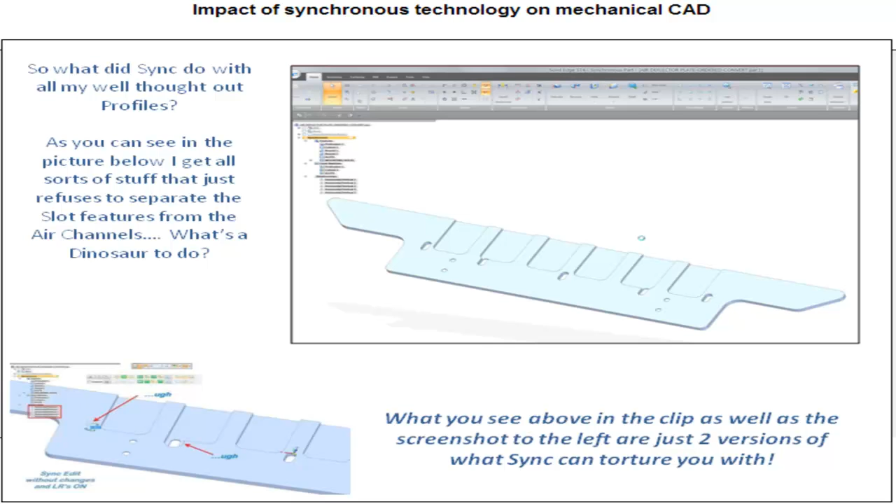So how I solved this was I couldn't use the user intent that sync was requiring me to use, but I was able to copy the sketch or the part features, because it was an original Solid Edge part, very effectively, and re-put in those slots and then have them completely become associative to the Synchronous part. This was a very fast and very easy way to do it, and it turned out to be very successful.

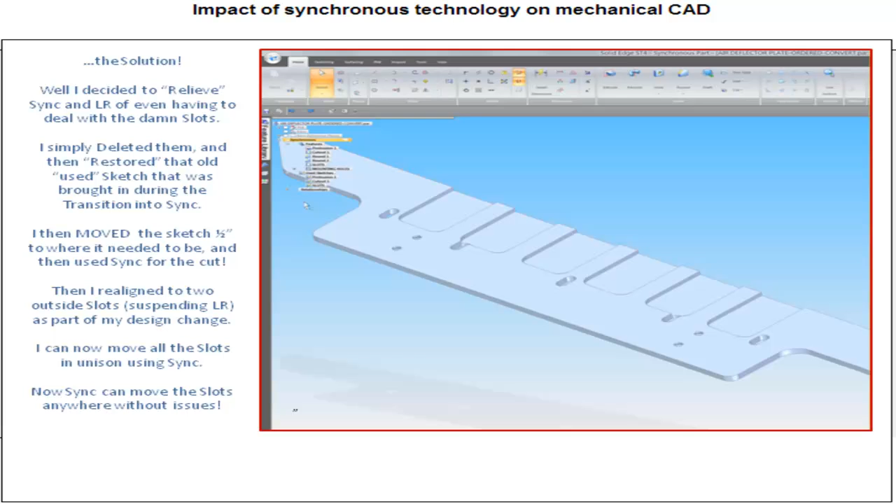I was able to redesign the air channels and reposition these oval slots so that we didn't have the air leaks anymore. So within about 10 minutes, I was able to change this plate completely by using Synchronous technology and actually have the parts made relatively fast. It was very successful and really opened my eyes to how effective Synchronous technology could be.

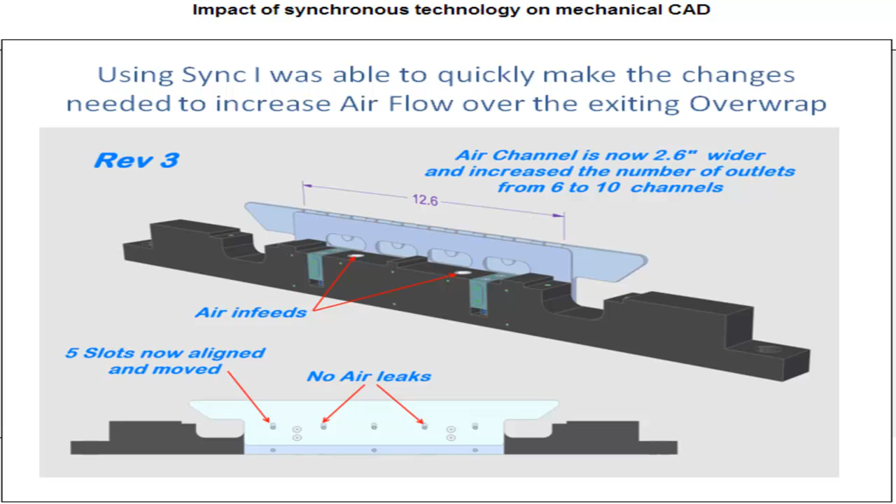Although I don't have a video here, this all can be done in real time, where we could change the pitch of the seat, how far back it's at, and change the height, change all of these details.

Just from the assembly environment, I was able to edit all of these parts. So whether I was changing the height or changing the backrest, it all flowed right through assembly.

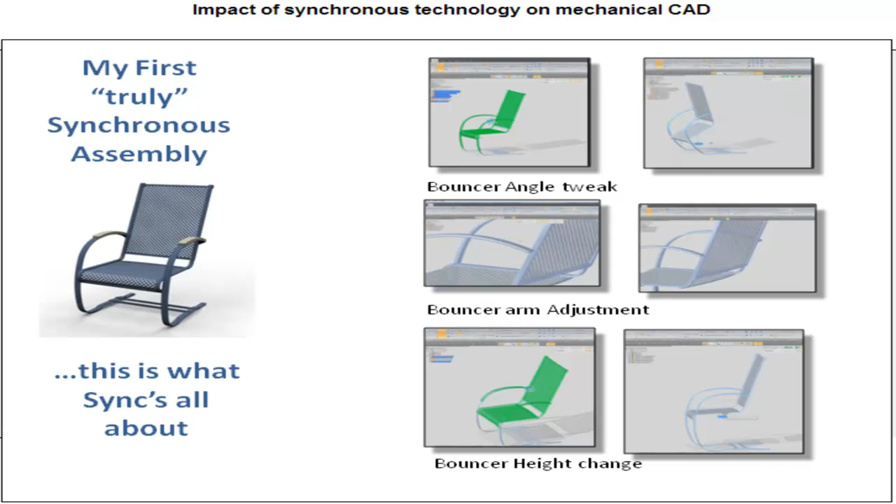So it was sort of a struggle at first, but once I opened my mind to it, I really found myself becoming a convert, where I opened my mind and I found that Synchronous was really, really intuitive and smart, and I find it very, very enjoyable to work with now. So thank you very much for your time.